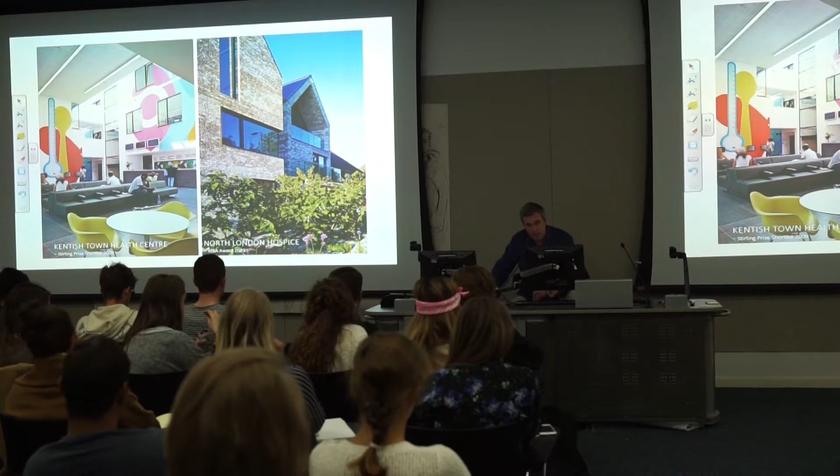Education is a big one for us - Westminster Academy and Burntwood School there, both Stirling Prize nominated. Across the arts, you can see the Saatchi Gallery and the Barbican Arts Centre. In healthcare we don't do so much, but generally the smaller projects - North London Hospice to the right, a really interesting typology. And we do lots of housing.

I'm not going to talk about housing today very much - I believe there's lots of people coming in to talk about housing. Also schools, so sorry if I'm going to bore you about schools today. And then office buildings - we were working on the Google headquarters to the left there until it got canned about 6 months ago, but maybe that one will come back again.

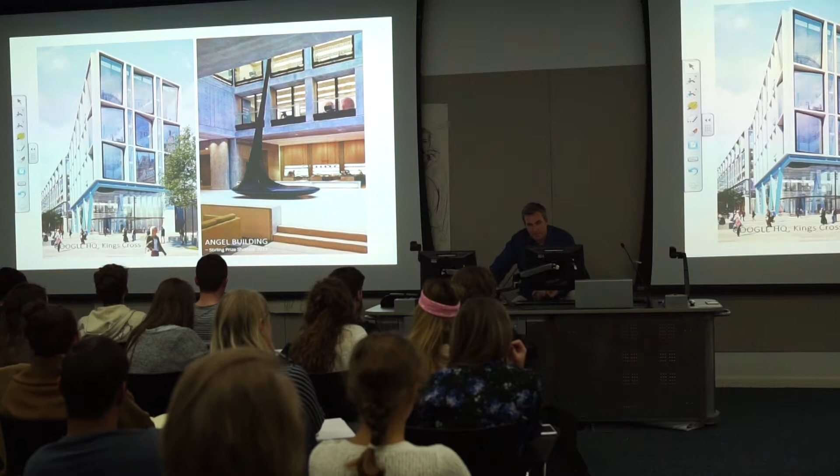Out of the Bristol studio, we're kind of a microcosm of the London office. One big project is Television Centre - you can see on the left-hand side a sketch which evolved out of the Bristol office and has turned into a massive master plan, 1,000 homes in West London in the old BBC centre. There's about 30 people working on that now exclusively in the London office, but it's interesting to see how a sketch will gestate into a much larger project.

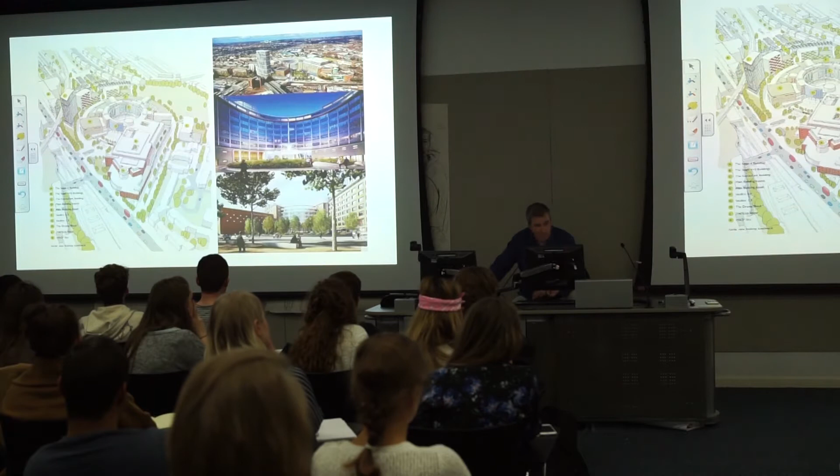This is a scheme in Falmouth, a retirement home facing Falmouth Bay. This is really interesting - working with a developer, looking at reinventing the retirement home sector, for people who are downsizing and what kind of accommodation they might want. It's all about flexibility and storage. This particular scheme is all south-facing, with massive balconies almost conceived as outdoor rooms, offering shade and amenity facing out into the sea. The architectural language coming out of that is very much a modern take on the Cornish or Falmouth vernacular.

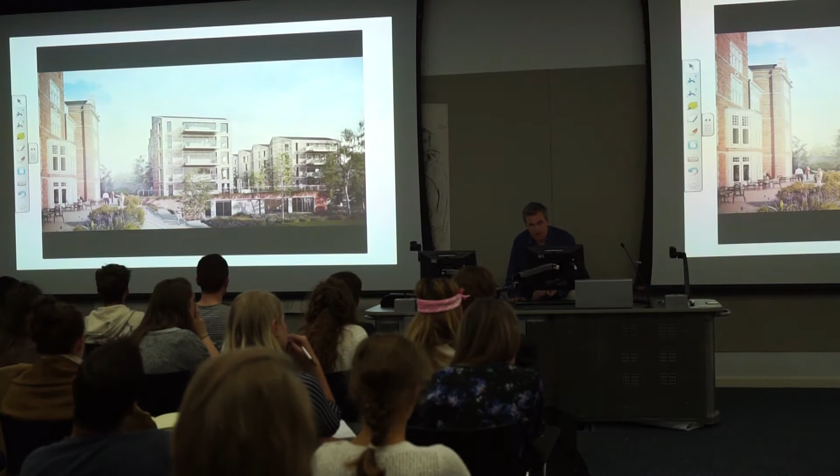Then another retirement home here in Bristol, in for planning. I was going to talk about this, but I don't want to tempt fate because we're at planning committee next week. But again, some similar concepts, looking at reinventing the retirement home sector in a very particular context.

This is a scheme in the very early stages in the centre of Bristol called the Pithay - actually a refurbishment of an old office block. What we find interesting, and I believe Pocket Housing are coming in to see you next week, is how you might design for a different sector, a rental sector, with smaller flats. It's all about the social aspect of living, squeezing the bedrooms, putting lots of storage in - you can see here 2 doors into the flat rather than 1. Interesting ideas, trying to think about what people who are renting might want out of housing, rather than typical market housing.

So this is the scheme I'm going to talk to you about. It's kind of a 5-year project for us in the Bristol studio. Started in 2009, finished 2014. Quite a stop-start program, and I'll tell you why in a minute.

This was part of the Labour government's Building Schools for the Future programme, one of the most ambitious building programmes of the last century, where they planned to rebuild every single school in the country because they're all falling apart, to be honest. And they still are, a lot of them.

In case you didn't know where Birmingham is, it's a little bit north of Bristol, so it's a kind of perfect triangle between our London studio, Bristol, and Birmingham. So it kind of came our way. We were doing a number of schools in the London office, but just about the time we were going in for planning, this happened.

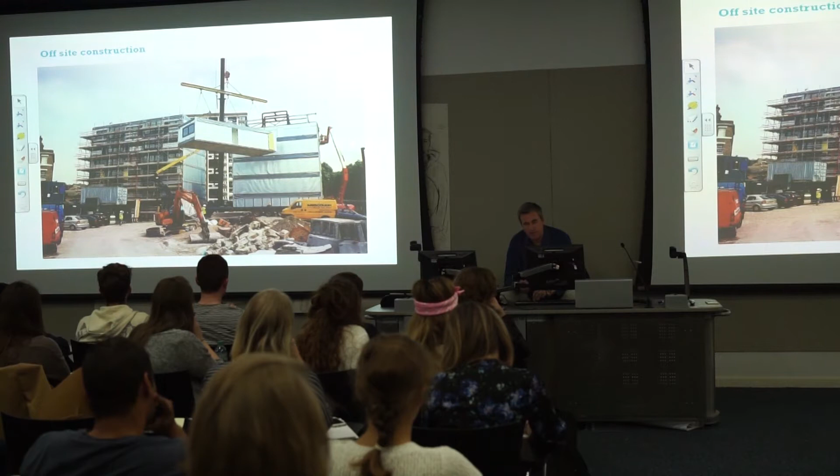But no, he went to the market, a different part of the market. So what do you do? What do you get for 500 quid a square metre?

This is one of our schools, I think at the more expensive end of BSF, about £2,000 to £2,100 a square metre. This is Westminster Academy. This had a sponsor which kind of boosted that budget.

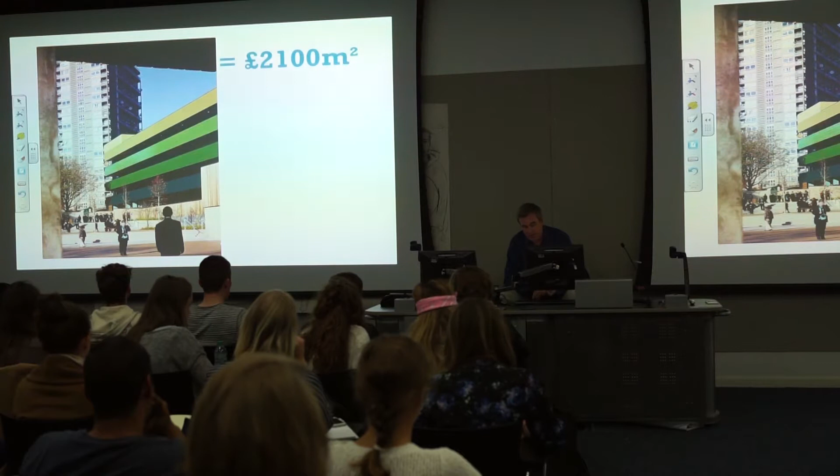This is the Tea Building in Shoreditch, an office building, which is a light touch refurb. This is what you get for about £700 a square metre. So you've got an existing building and this is a fit out.

So how the hell are you going to do a school for 500 quid a square metre? Well, this is his big idea at the time - he'll get the boys in from Tesco's and Dixon's, and actually it'll just be a shed, and that's about what you get with nothing in it for £500 a square metre.

Interestingly, though, we were already doing this in terms of prefabrication. This is Laing O'Rourke up in Yorkshire. They had a factory ready to go, which is all about making kit-of-parts schools.

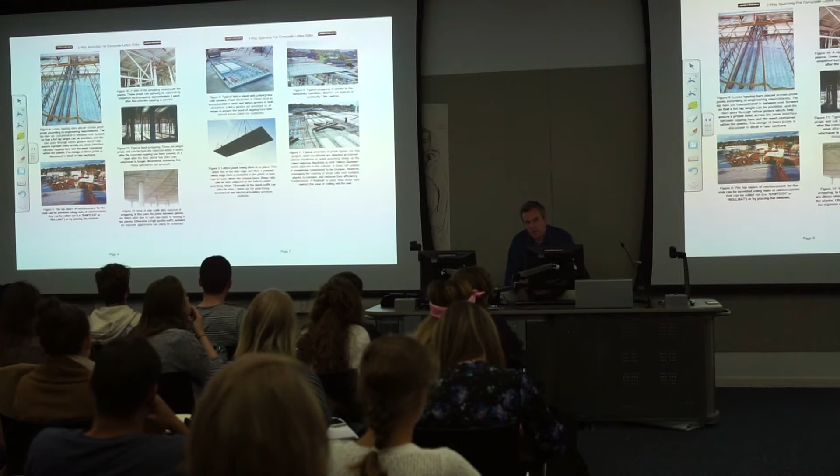And we had actually completed one of these schools in Dagenham, where absolutely everything was done off-site - floors, walls, columns - and they're all loaded with services, so smart wall systems, just craned into place. A very modular school which could be readily adapted to different educational ways of teaching in different sites. But no, that was ignored.

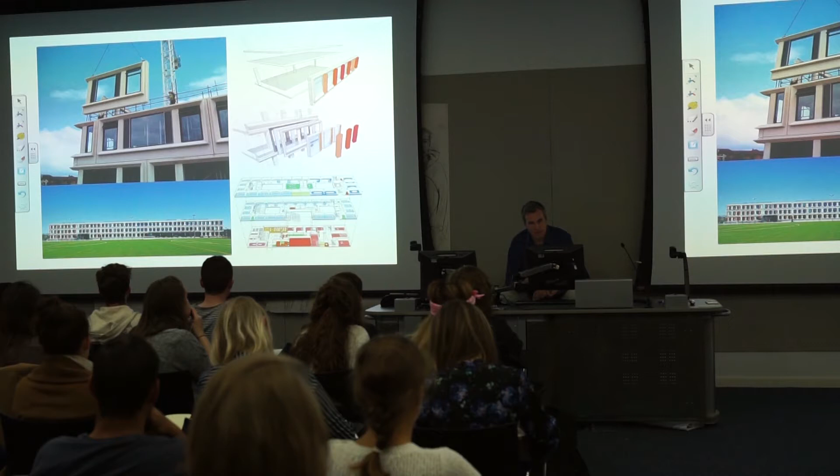18 months later, I think he finally figured that this wasn't really going to work. So what they did then, they commissioned another set of architects, and they came up with this idea. They had the Education Funding Agency produce 2 different plan types, the super block and a finger block as well, with a target of £1,200 a square metre.

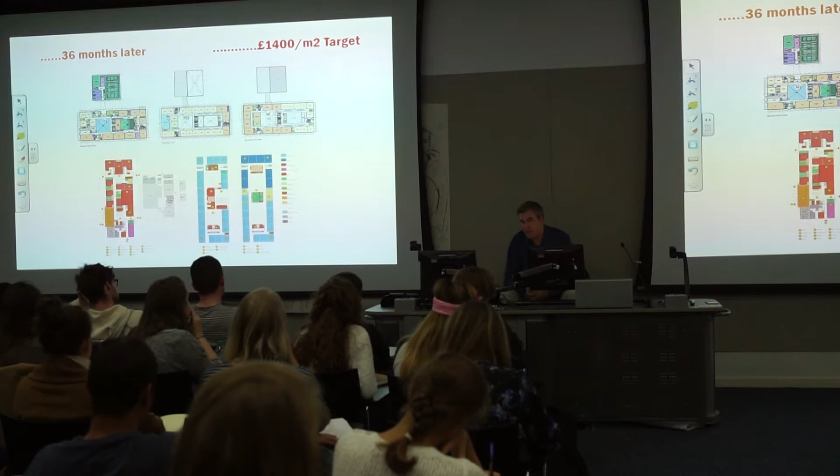Interestingly, that's very similar to the plan for Dagenham Park School. It took them 18 months to come up with that, and then 36 months later, the target spiraled up again to 1,400 quid a square metre, which is about what we had done Dagenham Park for 36 months earlier. So that's a rant over now. But that really does set the scene for where we were with Birmingham BSF, because it's definitely the backdrop.

We were, I suppose, one of the last projects. Birmingham had a plan to rebuild 90 schools back in 2009. I think we were number 20 on the list, and then BSF got canned, so we were the last one through. So you can imagine the contractors, they're going to try and squeeze every penny out of this, because their profits were based on 90 schools, not 20. So they had a longer game plan on this.

So I suppose that was tough times, really, because any sense of joy or anything else we might have had in the early days was going to be squeezed out. So the building had to be incredibly efficient. Everything had to pay for itself and justify itself in order for it to get through.

So Waverley School, it's about 4 kilometres east of the centre of Birmingham, quite a deprived area. This was the original school, built for 400, and there was 900 in there. Added to that, we had to incorporate a primary school, so this idea of an all-through school, all contained in one building, so kids from the age of 4 to 17 would be in the same school. That posed its own particular design challenges.

Just some key statistics there. Interestingly, 10% with English as a first language, 60% of kids on free school meals. So a challenging area, but an incredibly positive cohort, and the teaching staff as well. So there was a real sense that we could do something good here, even though the budget was incredibly tight.

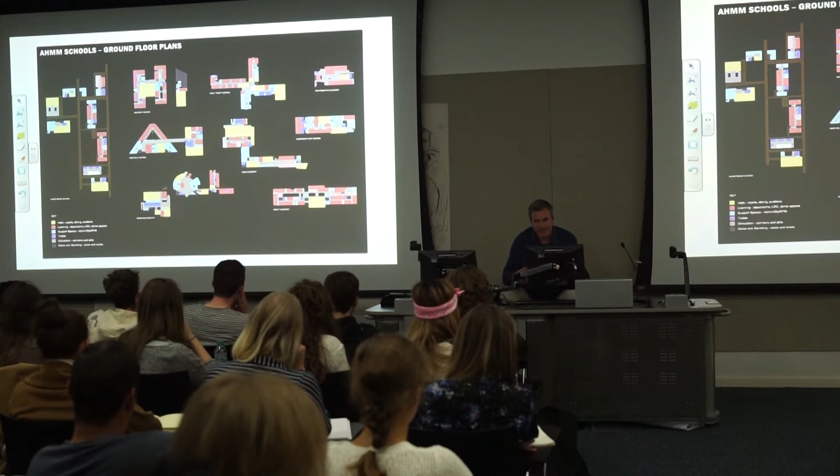Gove's idea was that one plan should fit all, it shouldn't be site-specific. These diagrams, I think, go some way to showing that actually the plan should really derive from those ongoing conversations over many months, even years, to try and get the right solution for that context.

These are the early sketches you do, looking at different configurations, looking at how the clusters might sit on the site. I'm not going to go into these very much, but one we settled on after a lot of looking at the clusters itself. These are early sketches trying to establish how those bits of stuff go together to form one of these clusters.

Interestingly, this idea of a school within a school. So you get your classrooms, and then all of these support rooms, teaching staff, breakout spaces, all contained within that individual cluster, which minimizes kids having to travel time within the school.

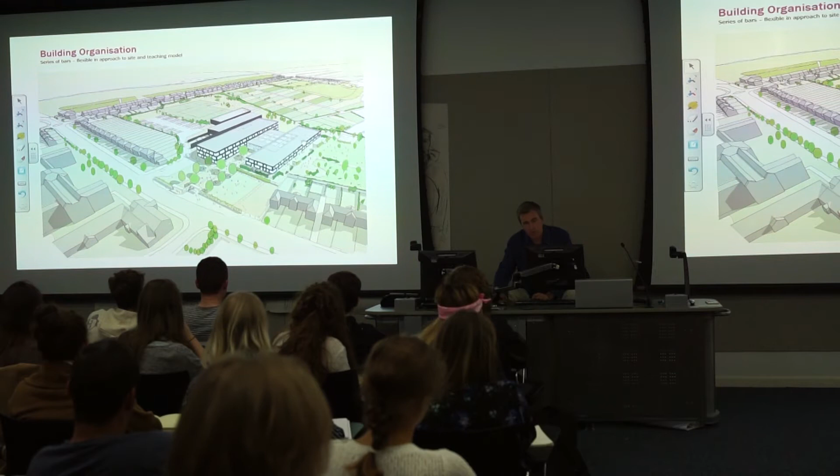That's a specialist cluster, science, which is much bigger. So we settled very early on this idea of a series of fingers, of bars, which cascade down the hill dealing with the site's topography, and engage with this idea of a boulevard or a street as the main entrance. It's a very efficient model we'll talk about in a second.

Atriums are great, they are wonderful. But in the world of BSF, every bit of that floor area has to be paid for. It's all quantified, and it all comes from this brief you get. And we found that in this context, not always, but in this context, to be particularly wasteful.

One of our main ideas is we're going to take this space and pro-rata give it to all of the teaching spaces. So we're going to have wide corridors, social spaces within the clusters. Rather than this kind of glory atrium space within the entrance or arrival area, we give that back to the teaching areas so they feel more generous and welcoming, and the kids want to stay in their clusters longer.

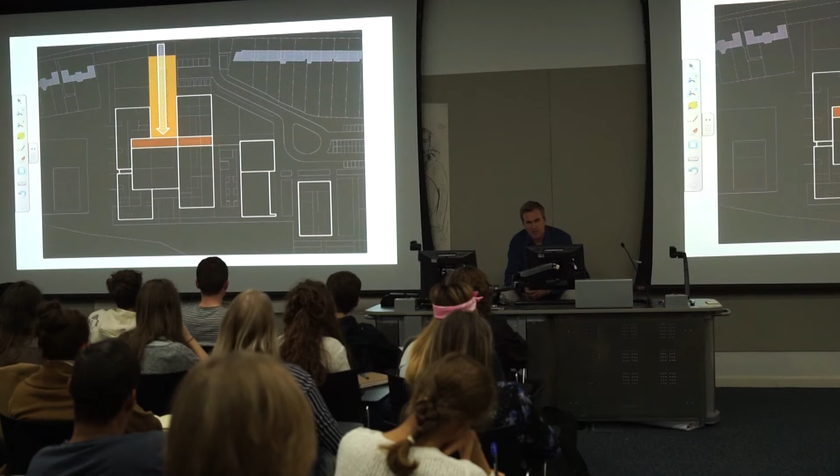As an organizational diagram, we have that series of bars, but really important was how we connect in a civic way with the entrance. We flashed this idea up in the early days, this idea of the stately home, this grand arrival, the boulevard, a 70-metre long walk to the front gate—quite a nice idea, really, and something we've tried to maintain.

Some early sketches about that. It's 20 metres wide by 70, connecting with the main entrance and halls behind. Then the idea at the entrance is you're trying to mark that entrance on the street. It's quite a domestic environment, so we didn't want a big building right on the street, but somehow you need a marker that brings that entrance 70 metres up the boulevard to the street. That was quite key, really.

So the bar to the west became the primary teaching area. Most important is that these kids get delivered to their own front door, with almost these concentric layers of protection—the big noisy kids are here, then you've got your primary hall, the social areas for the kids, classrooms, and their own particular outside space. It was really important to have this kind of onion, these layers of protection so they felt safe.

What's really interesting is the kids from day one have uniforms here, so they do feel part of the bigger school. But even still, we wanted the school to feel like a primary school rather than just part of a bigger secondary school. Crucial to that was a very fluid and open layout—rather than doors, we've got a series of screens which subdivide these very fluid classrooms, so there's a real sense of inside-outside connection, but also fluidity between classrooms.

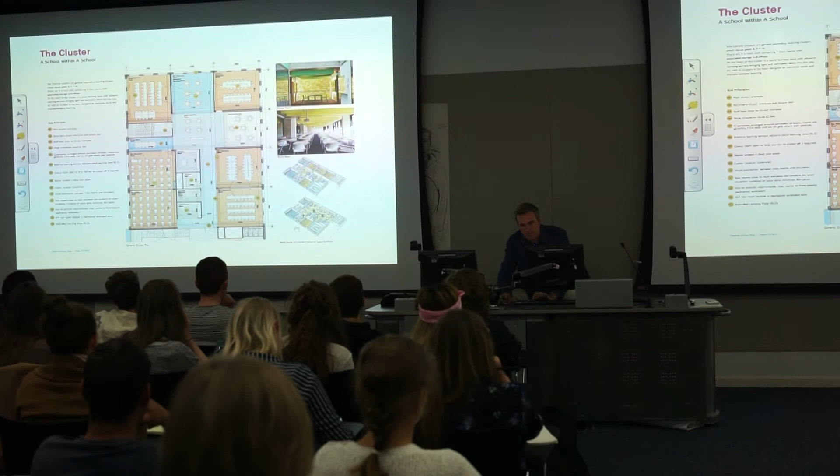I'm not going to talk much about the plan, but these are the final plans here. Incredibly, a lot of work went into these. That was the main DNA of the block, where you got your normal cluster, your generic cluster, and then science here, large central social learning zone in the middle of the plan. So the idea that all these classrooms face onto these social spaces is really important.

Site plan, landscaping, incredibly important, needless to say. Just some photos looking at that social learning zone.

There's no kids in the photographs. Really sorry about that - schools are all about kids, but our photographer didn't have a CRB check on the day, so kids had to be ushered out, which is a bit weird. I was going to Photoshop some in, but that would have been weirder.

Classrooms. Anyone who's looked into schools, you can see it's been tarred a little bit with the PFI brush - the suspended ceilings. Probably not what we would normally do in a school, but actually with PFI, there's a particular emphasis on longevity and maintenance, which means you've got to play by the rules a little bit sometimes.

Classrooms, and then some more of the components of that generic cluster: group rooms, social heart, terraces. And that is our 2.6 wide corridor, which opens out to a double height space.

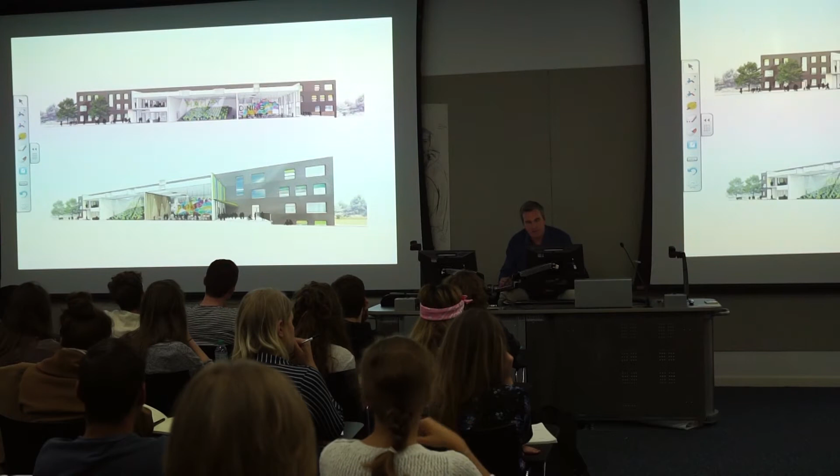And then coming up with some really pragmatic solutions for things like acoustics. This is a Siberian larch wall, which is just simple softwood battens on a felt backing, which open out. And that felt really soaks up the acoustics, far cheaper than a lot of the gaudy baffles you might see and all of the other kind of off-the-shelf acoustic solutions. So a really, really cheap and textural way to achieve a really important function.

Some images from one of the walkways looking down at the dining space. This idea of these Wagamama benches, which I see you've got outside as well, very social and just makes it feel like a fun, grown-up place to be.

Yeah, just some images, the same space. Auditorium connected to that space directly, and they open out onto each other. So black box function could be in the deepest, darkest parts of the plan.

And then just some bits of furniture, which this is that idea of that buffer for the younger kids. They've got this kind of learning, social area full of all this fun stuff, which is there now, not in this photograph.

In terms of the external appearance, this is another, going back to the idea of efficiency and, you know, the contractor is your boss here, or is your client rather than the school. And by far the most efficient way to look at how a classroom might function, we looked at a lot of different ways in terms of configurations of windows and openings.

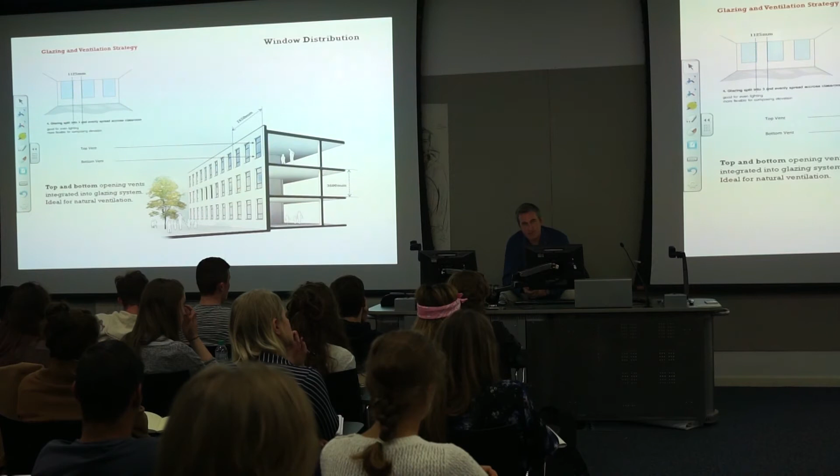Another starting point for us, I know this is the Ibstock series, I thought I'd give a nod to brick dimensions here. But from day one, we looked at brick dimensions. We didn't want any cut bricks on this project. So the grid was 7650 by 3.6, piers were 1125 from the beginning. So you make it much easier on yourself if you can have these considerations early on.

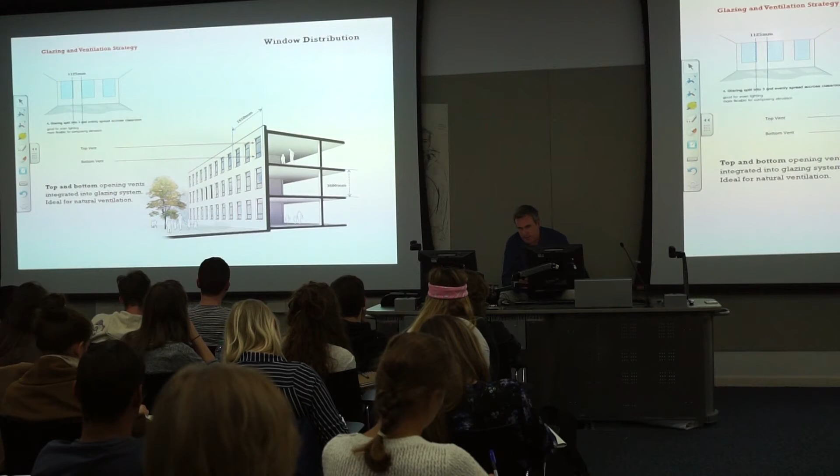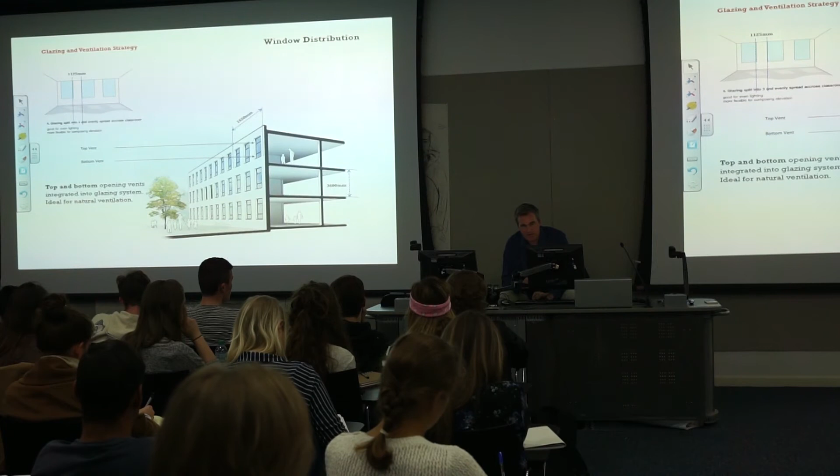We wanted it to be built of brick. A lot of the bad BSF projects had these kind of gaudy, multicolored facades, which are actually incredibly expensive. Brick is by far the most cost-effective solution, and it's got longevity and beauty and richness to it as well.

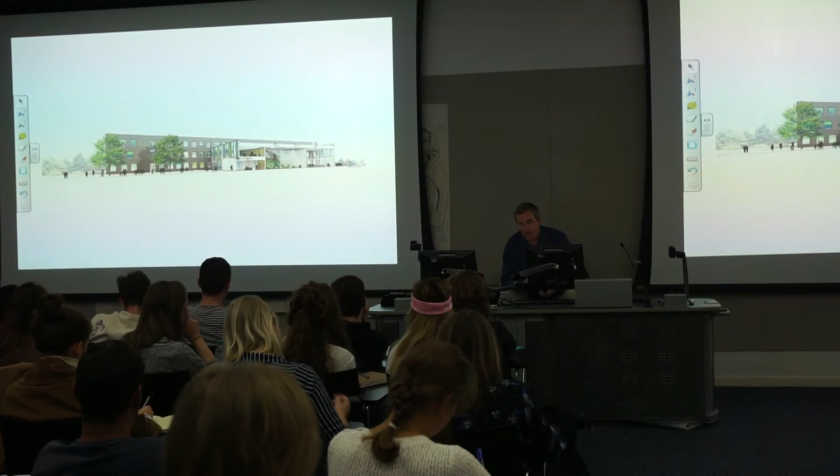So yeah, that's pretty dull, to be honest. But with that, you get your special moments. How do you incorporate your staircase? How does that kind of break down as you get double aspect rooms, bigger rooms as well? So you might have 3 windows for your standard classroom, but a standard classroom is probably 50% of the overall makeup of the school. So you can have a bit of fun then at end elevations and how it might mutate towards particular local internal conditions.

So this is an image of one of those corner conditions as well, where you're ventilating through this way, so you've got bigger fixed windows, which really do help to animate that facade.

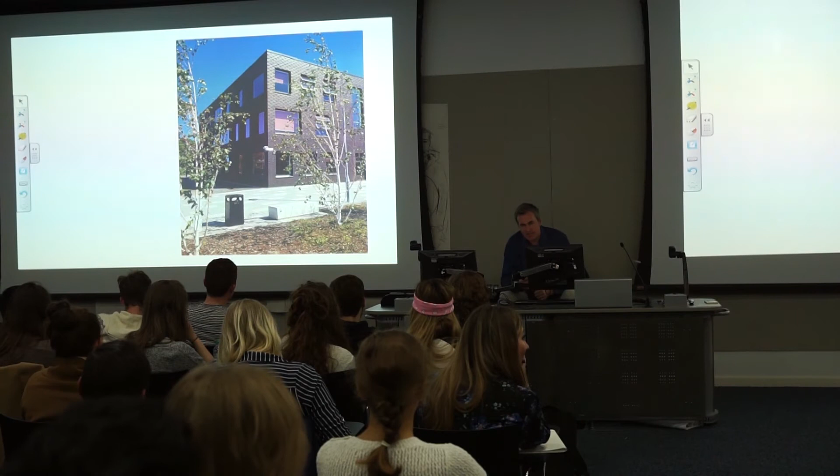Another trick we used, and this was a first for us, is using blinds - the idea that we have this kind of monochromatic building, which becomes a backdrop for colour. So we've used blinds, lots of different colour blinds, as a kind of secondary layering, which is actually quite effective. But yeah, in terms of the brick, we didn't have far to look really.

All around Birmingham you get these wonderful railway arches and Victorian warehouses built with these Staffordshire blue bricks, which are essentially red bricks starved of oxygen. So we found a brick which was very, very cost effective. I mean, this was the recession, so I suppose they were vying for a lot of business.

So this came from 20 miles from the site. And it's about £300 per thousand. That's quite cheap, by the way. And then we were looking at a secondary accent brick, a white brick, which are normally quite expensive.

But again, in Wales, we found this, which is a concrete brick. And that was even cheaper. And then that was going to be used where we needed to bounce light deeper into the plan, mark entrances, and the like. We chose 2 different bricks for the primary brick.

So we've got a smooth one, which is going to reflect the light, and then a drag-faced one, which is very rough and absorbs the light. We arranged it in a hit-and-miss pattern, which really helps break down the scale of the overall volume of the wall, and also has an incredibly rich texture.

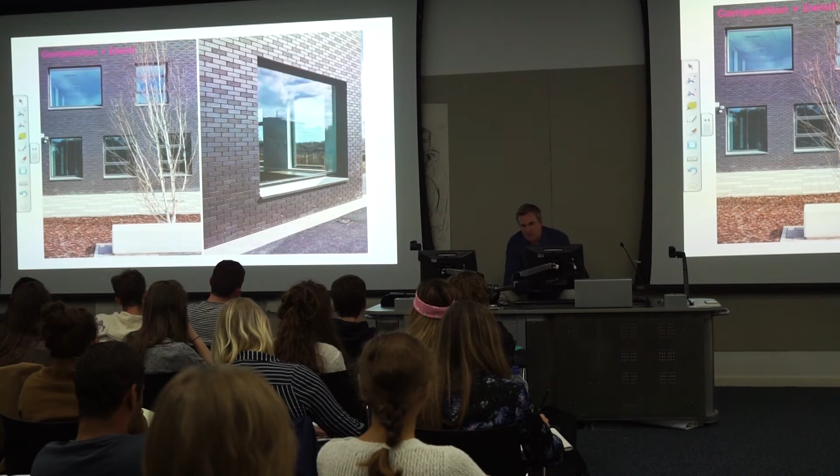One advantage of having a very efficient building is that we could persuade the contractor to have a deep reveal, which isn't always a given. If you look around town, you'll see windows flush with the external wall, which is a bit miserable, with no depth or layering. It's more expensive, but it's really important to get a bit of depth to that window reveal—it really helps the facade in a huge way.

Little things as well—this is the primary school. Having low window sills should be a given, but unfortunately it's not. Kids are small and they should be able to see out over the windowsill. But that was a big battle, even to do simple things like that with a contractor.

Just some photographs, this is looking at the primary. You can see here, using that white concrete brick to mark the entrances, just to make that more legible. And then in the terraces as well, we have the hit-miss pattern, but that white brick bounces light deeper into the plan—it is a deep plan building. Just an image of those terraces.

Looking back, one of the problems I talked about earlier was dealing with topography and how the buildings have to deal with this massive level change. We did it in two ways. One is between sport and the main teaching block, you've got a massive retaining wall and a big staircase. That was just a function of what we needed there, but it's not necessarily the best way of doing it in terms of landscaping or even architecturally.

But for the main, between the primary and main block—this is the dining area here—we had this idea of a cascading series of allotments, which deal quite well with that level change. It also becomes a really social space for kids at lunchtime. There's a nice idea of from allotment beds here, to dining area here, to kitchens. This was the school's own space to inhabit as they wanted, which was quite exciting.

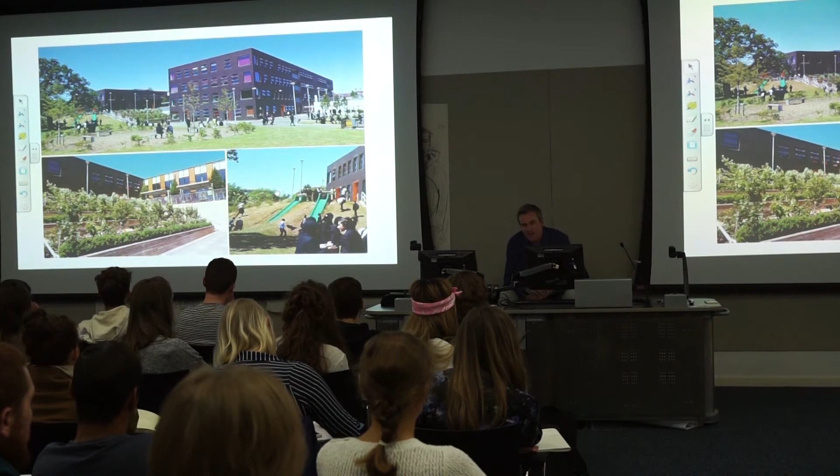So they've planted olive bushes and other food-growing plants. What's really cool is they've dealt with the level change in their own particular way as well—they put a slide in, which is really cool. Our landscape architects weren't nearly as fun as that, but it's really nice. I went back a few months ago just to see this happening, and it's really, really nice.

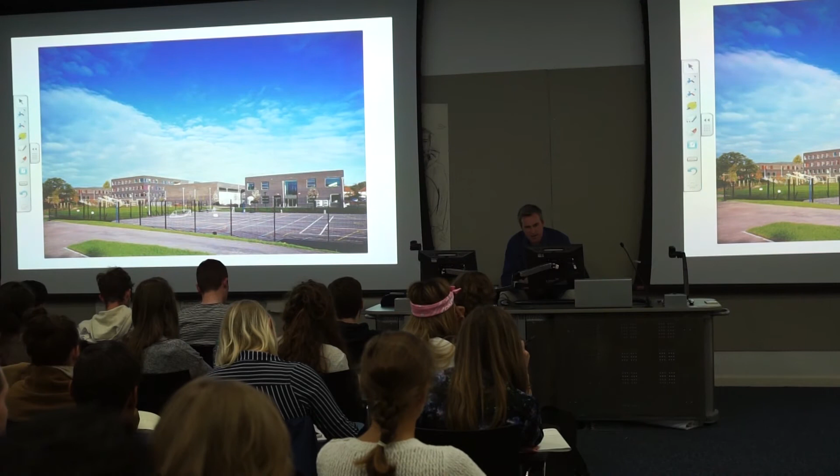That's just an image walking back of the composition of the buildings. That was really important to us as well, about these monolithic blocks, how they fit in the landscape, and the varying heights and arrangement.

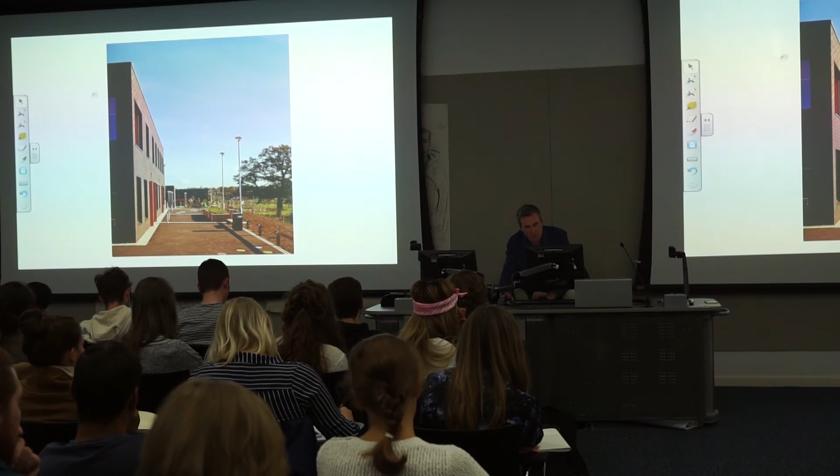View down, so the allotments on the right-hand side there. It's really important that the primary school block has a different scale to it than the main block, which is much more full-on, much more serious—you go from 2-story to 4-story.

A really important part of the school for us was this idea of graphics and wayfinding. There was a wayfinding budget—I can't remember what it was—but our take on wayfinding is that if you design it really well, you shouldn't really need very much wayfinding. Things should be intuitive. So for us, we used our wayfinding budget around this idea of giving the school an identity.

We do this on all our schools. We've got a collaborator called Morag Myerscough, an illustrator based in Hoxton, who really helps us on a lot of our projects, working with the pupils, looking at how we inhabit this white, sterile space. These clusters were designed as a backdrop to the identity which would evolve in collaboration with the kids.

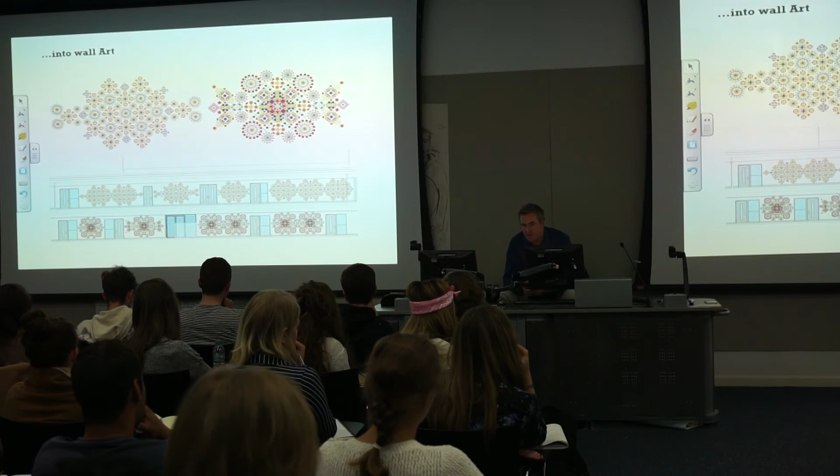And then that got turned into much larger graphics within the circulation spaces, in the primary areas and the admin space as well. So really cool ways of animating and giving personality, which is meaningful to that part of the school.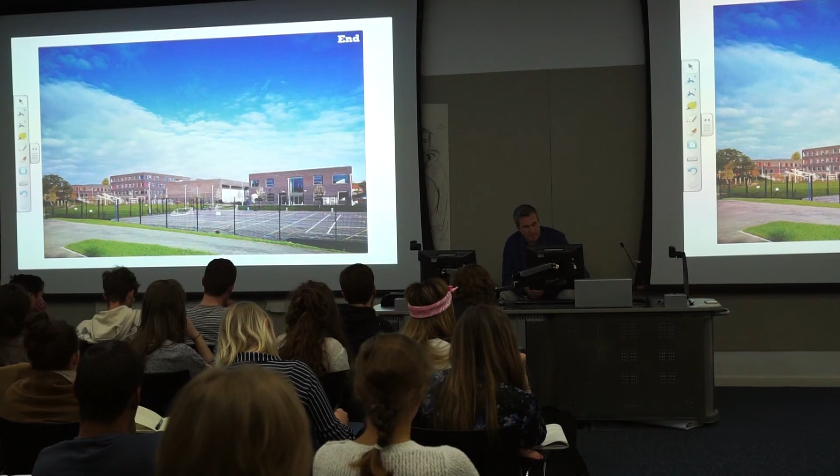That's it. I think I was going to have more photographs of the building, but...

Thanks, Cormac. That was a really interesting run through the design process. Hopefully that's a bit of inspiration for anyone working on larger projects this year. Has anyone got any questions for Cormac at all?

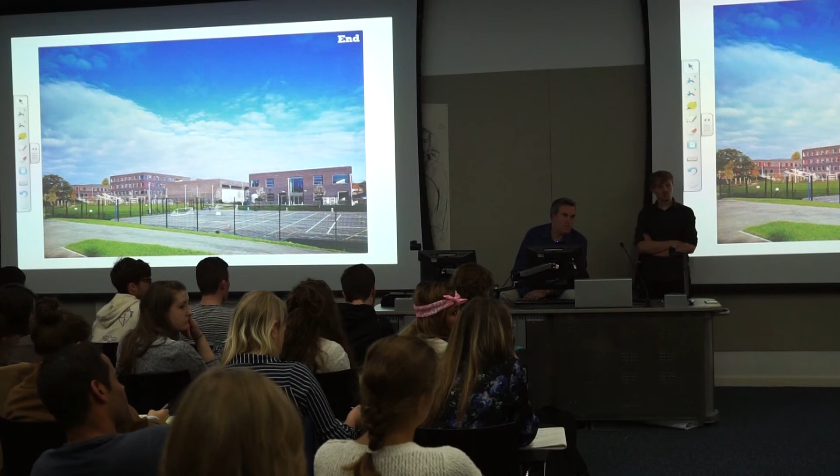Sorry, I couldn't hear. Sorry. Yeah, with the formulas. Yeah.

If the formulas had been working before, we wouldn't really need to rebuild the schools. Why would they take that into account and not challenge it in the way of designing a new school and a new environment? Well, the formulas were based... are you familiar with BB98? That was very prescriptive, and you had to work with them. I'm not sure if you're talking about what's changed since then now, but...

As in with designing this school, for example, yeah, the sizes of the classrooms, the way the clusters were had to be a specific way, the science areas. Was there any actual move on that, or did you have to stick with it?

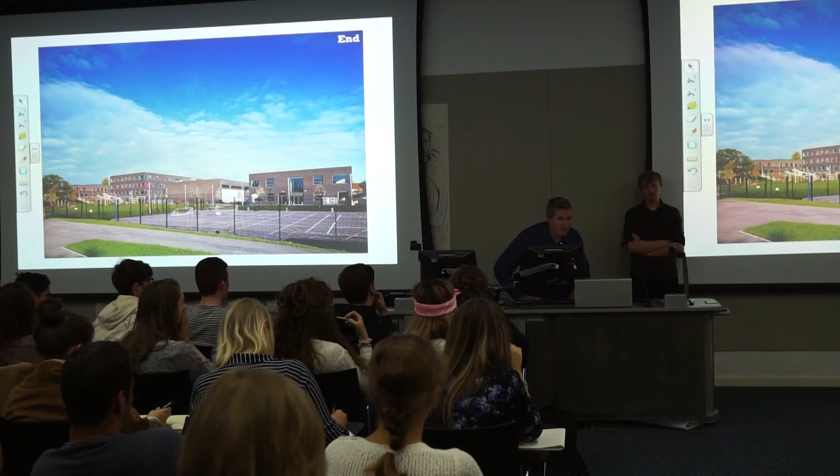Oh, no, there's a lot of flexibility within that. There's lots of room for interpretation. And to be honest, a good architect can use that to their own advantage, because all of the clusters, for instance, were different sizes. They didn't stack up neatly. You can look at that there, and the building stacks up very, very neatly on itself. So there's a lot of horse trading about squashing things, displacing things. They're a great starting point, but I think there's room for manoeuvre there.

What Michael Gove has done, though, is he's taken those formulas and chopped 15% off, made classrooms smaller, gotten rid of all of the social spaces and all of the good things that BSF had done. So, yeah.

Just what does BSF stand for? Building Schools for the Future, or for the past.

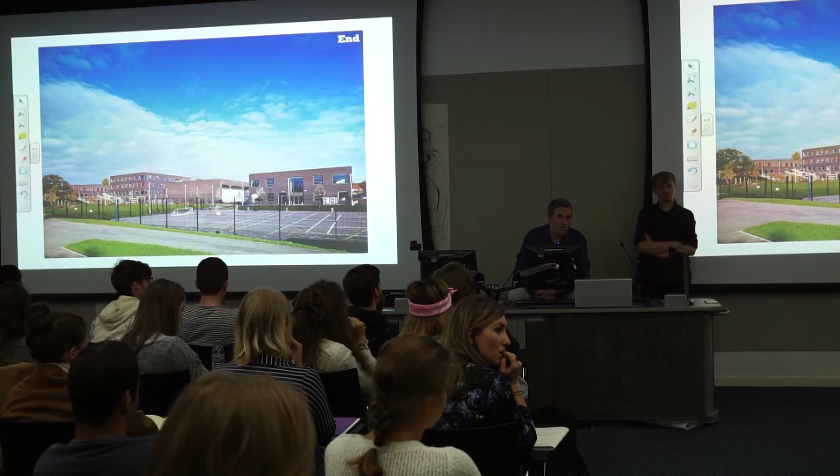Well, one of the things about the cluster-led model is that they are schools within schools. The primary kids stay in their own location and they're given layers of protection. It's an interesting question because we have done all-through schools before, and they tend to be a different school on the campus, with their own environment. Here, the direct brief was, no, they're part of the same school. They need to feel included. So it's rethinking that idea of progression through the school so that they're not intimidated when they make the transition from primary to secondary school.

And it's a really interesting idea, but it has to be such a fundamental part of the educational vision, and you need the staff and the backup to make that happen and work. The staff had to be educated, actually. That was a crucial part of it.

Yeah, that was an interesting question. We had to derogate against, so BB93 had very particular criteria on acoustics. We put in lots of acoustic baffling within the spaces. It does get noisy because open plan teaching isn't a new invention by any means.

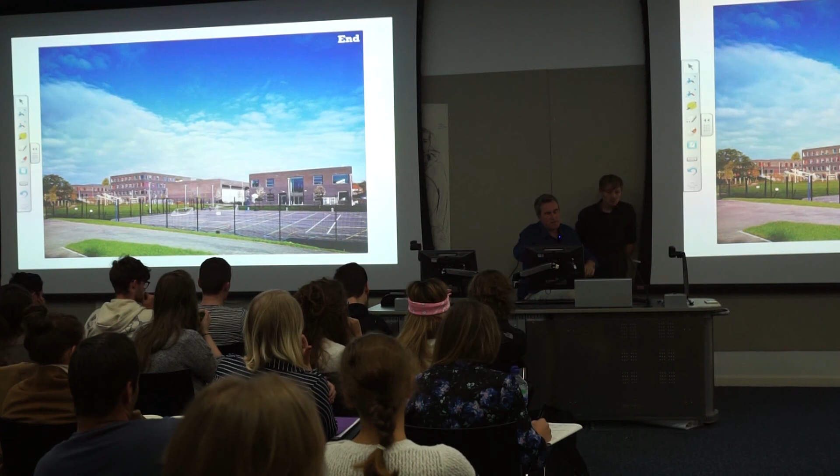A lot of people didn't think we'd be able to get a school on this site given the limited frontage, but we played this game of sliding these blocks back and marking the entrance with a more domestic feel, trying to keep back from the neighbours as well. You can see the blocks taper down as they blend into the two-storey section - the primary block is most adjacent to the residential neighbourhood, so they taper into that and are set back. You're right, 2,000 kids coming in at 8:30 in the morning to a quiet street - that's why we made a big play on that boulevard, that stately home idea, so there's enough room for them to scream and charge around, but not out in the street.

At what point in the design process did you engage the students and the teachers? Quite early on, actually, and it was continuous, but quite early on.